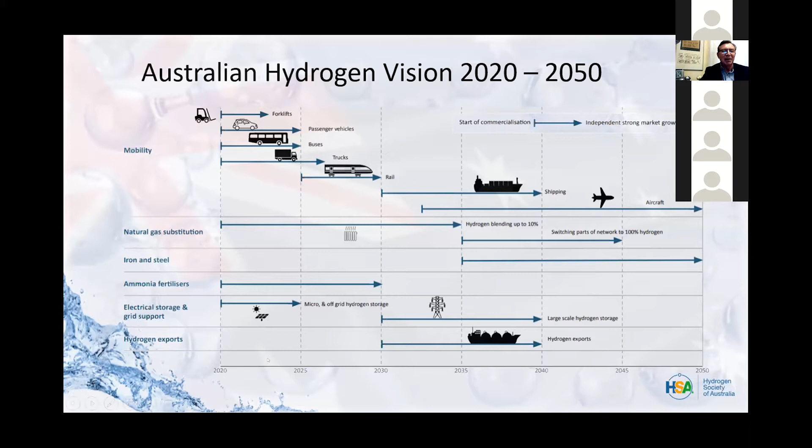With hydrogen export, for example, this was an ambition planned for 2030, but we're way ahead of that plan. The Kawasaki project in Latrobe Valley has already finished the ship—well, not finished yet, but it's already on the water and being finished, and the first shipment is planned towards the end of this year. So somewhere right here—theoretically there was already the first export of hydrogen from Australia to Japan, but that was more of a symbolic thing between universities. But hydrogen ships—still, we are pretty much ahead of time.

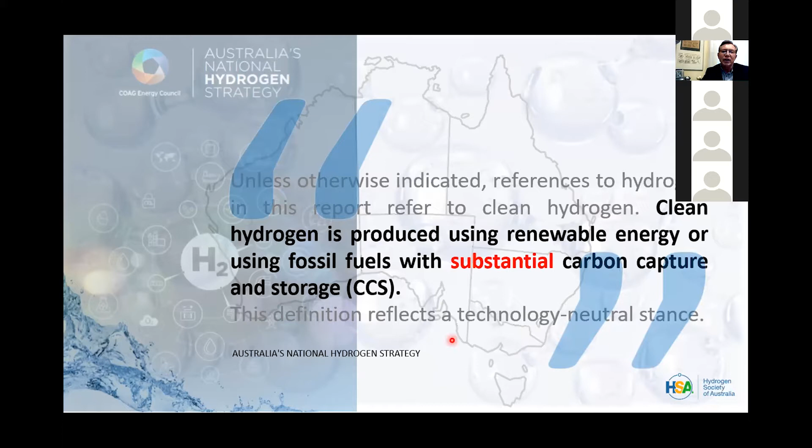Most of you know we have Australia's national hydrogen strategy from last November, and it's interesting that in bold we can see: hydrogen, clean hydrogen, is produced using renewable energy, or using fossil fuels with substantial carbon capture and storage. For government, this is purposely quite fluid, because 'substantial' isn't really a defined word. We are a leading exporter of coal and LNG, which together make up about $110 billion of our exports, so we cannot simply quit everything and switch to a different type of fuel.

So it will take evolution rather than revolution in Australia. As you can see here, the mature uses are already established. However, transport is a big thing, a new emerging use for hydrogen, and that's across all areas, not just heavy transport.

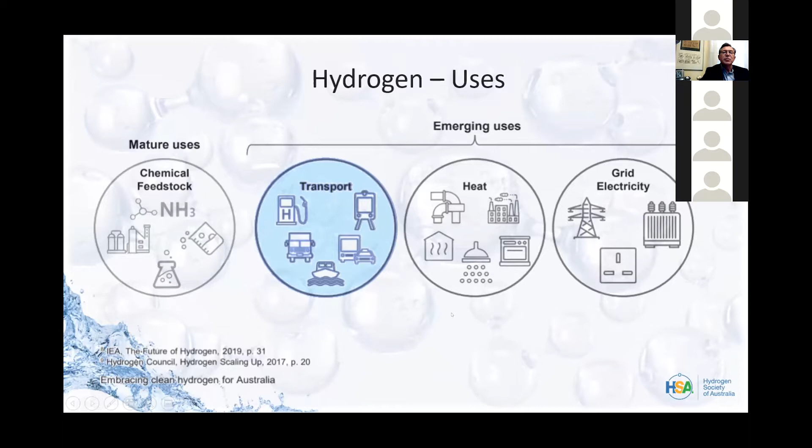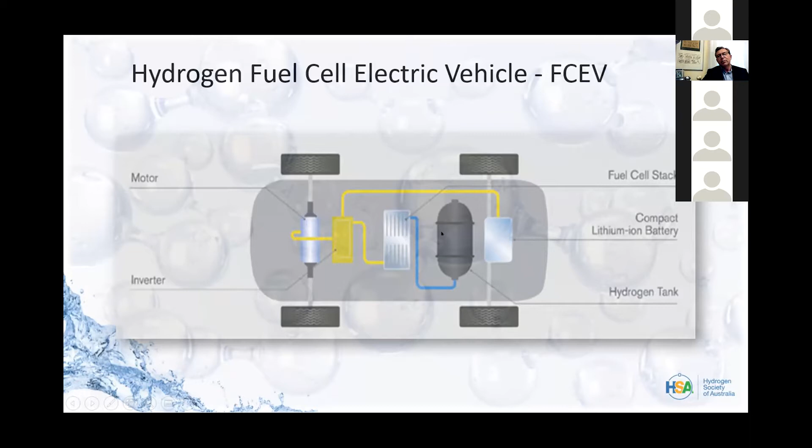Most of you on this call probably already know how the vehicles work, but just in case, very briefly, this is the inside of a hydrogen vehicle. I still come across people who don't know that hydrogen vehicles are actually electric vehicles. They do have batteries, small ones, and they have a hydrogen tank and a fuel cell stack, where a chemical reaction is created inside the vehicle to create electricity.

This is how the tank looks, this is how the fuel cell stack looks, and this is a tank from a passenger car. It's made of carbon, a woven carbon, so it's extremely strong as well.

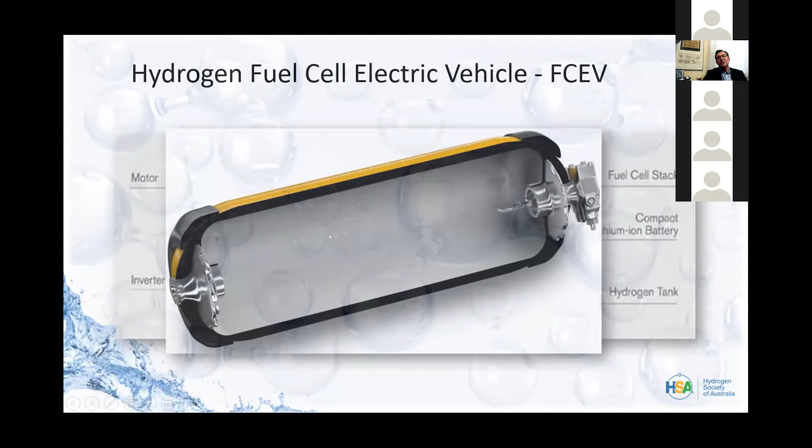I just wanted to check, since I'm not sure who else is watching, how much knowledge people have of hydrogen and hydrogen vehicles. This is according to the strategy we've been discussing, what the government is aiming for. I think Toby mentioned getting to $2 by 2030.

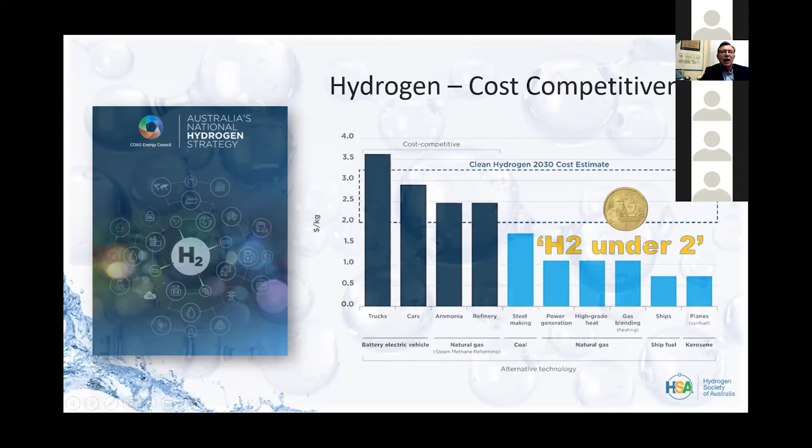However, what's interesting is that since then, in less than six months, the government's view changed. Now there's a big campaign called 'H2 under 2,' where we're basically now trying to get to that level. How far this will go, people are speculating. Could it go that far? That would mean hydrogen could be used across the board in all industries, or it couldn't. Is that actually good if you go that low? Would it be feasible for the economy? But it's an interesting exercise that in a very short time, governments who are usually very conservative changed their view so much.

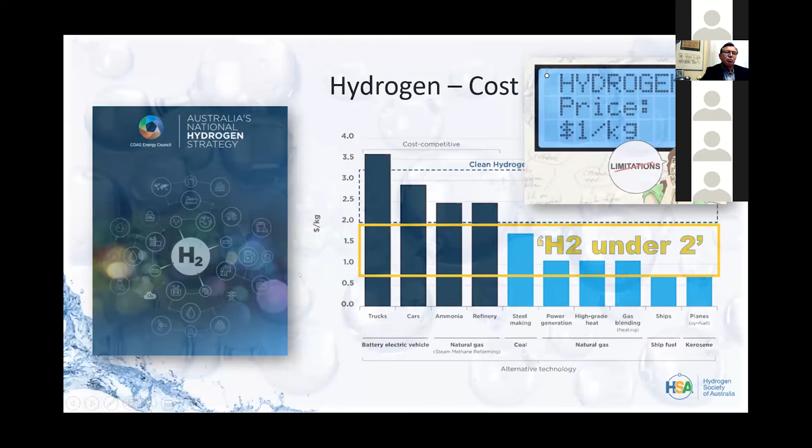Also, as you might remember, we were previously talking about Australia being 100% renewable. Then last year our chief scientist was talking about 200% renewable, meaning we could export the rest. And now we're talking about 700% renewable resources, with Australia becoming a major exporter of renewable energy.

It's probably not huge numbers of those vehicles, depending on the economy. In Western Australia we have between 500 and 750. So it's not a huge number of vehicles itself, but they're like 2 megawatts on wheels, so they're huge power plants. Basically you pour diesel in them. They're electric vehicles, so they actually drive as electric, but they've got big generators onboard.

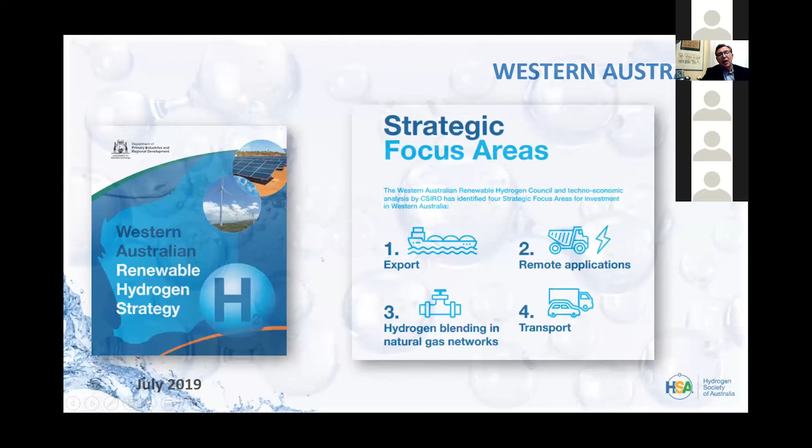There are some big projects, since Western Australia is especially a big place. I don't know if Stephen is actually on this call, but there's the Arrowsmith project, which is $300 million. I know they're trying to even expand it right now, talking to Arena. We also have a huge project, the Murchison project, which is 5 gigawatts, a gigantic project actually happening here. Some of the hydrogen is supposed to be fed into our gas pipeline, from Bunbury to Dampier.

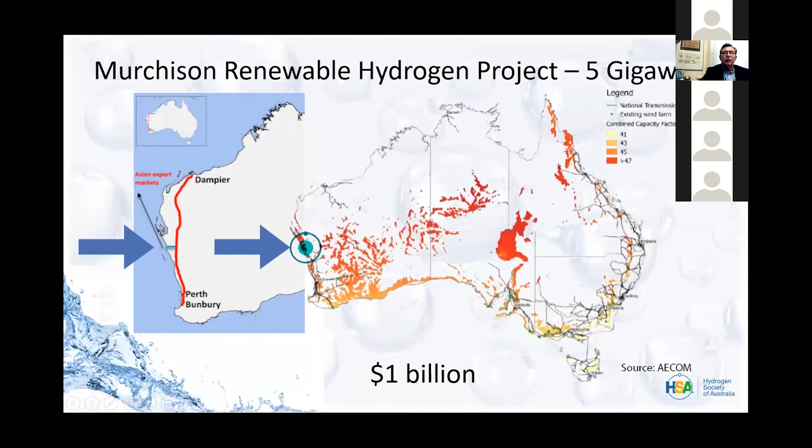Many of you know about the Asian Renewable Energy Hub, which has been on drawing boards for a long time and is now in the process of being implemented, which is giant.

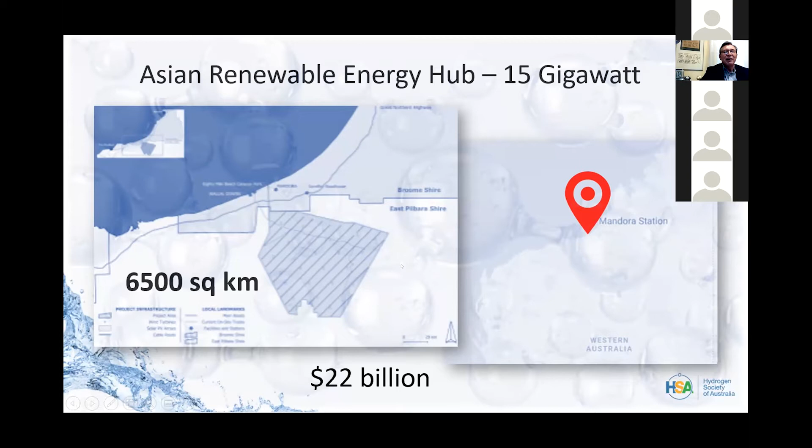This is, you know, sort of like a small country - 6,500 square kilometers, 15 gigawatt project.

Our participation in this Western Australian landscape is actually through Innovate Australia, which I run. It has many initiatives. One of them is the Hydrogen Society of Australia, and the main project of the Hydrogen Society of Australia is the Hydrogen Highway, which we created as a group back in November 2018.

Then there's Linda Reynolds, who is now minister for defense, but was a senator for Western Australia and a great advocate. Just recently I had a long Zoom with Linda as well, and she's a great supporter of the Zero Emission Highway Project.

So recently - I know Craig is on this call - we organized an event, we run events from time to time about the Hydrogen Highway and now the Zero Emission Highway. We had Neil Thompson from ITM Power, Craig representing Horizon Fuel Cell, Hyzen Motors with trucks, and Cam Dumesny, who runs Western Roads Federation - basically putting infrastructure, vehicles, and people together and discussing how we can make this into reality.

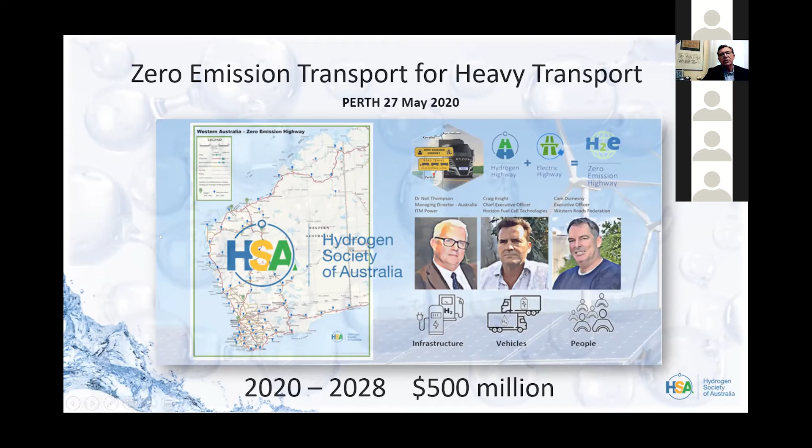As you can see, this is very important for us. That's why it's now called not just the Hydrogen Highway, but the Zero Emission Highway, because we feel very strongly that those two technologies have to work together. They do have applications in different circumstances, but they do work together.

So this one, again, that's me being a little bit cheeky - I just wanted to show some people and some politicians here what that would mean. $500 million, which is the cost of the project, an 8-year project. So this is our stadium, which I've actually been very generous with, because the stadium cost us $1.8 billion, although that includes the surrounding infrastructure as well.

That's sort of maybe not really the most appropriate comparison, but at least it shows a good illustration: converting the whole state, this giant state, into allowing heavy zero emission transport, versus just one-third the portion of a stadium. The economic impact on our future and our kids' future is going to be dramatically different between those two examples.

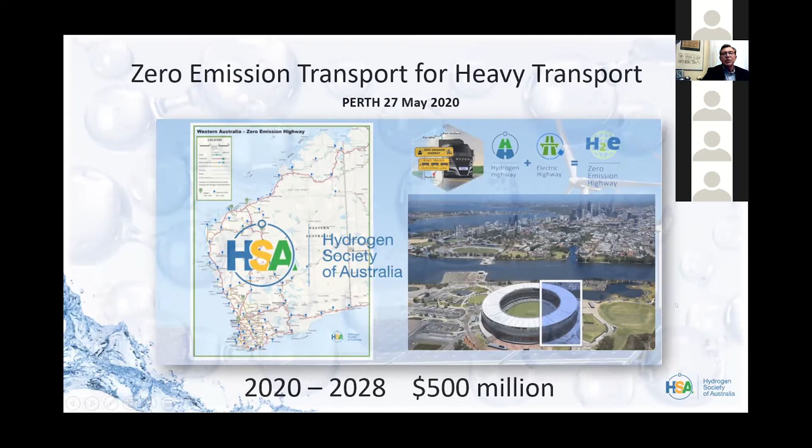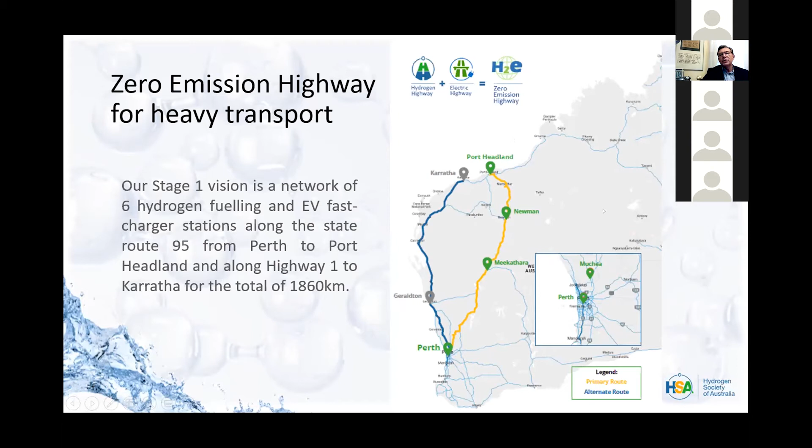So look, stage one, the idea of our vision, was basically to go from Perth to Port Hedland. That was our original plan. But then we decided - first for 2 years - but then expanded from '22 to '28 to cover the whole state basically.

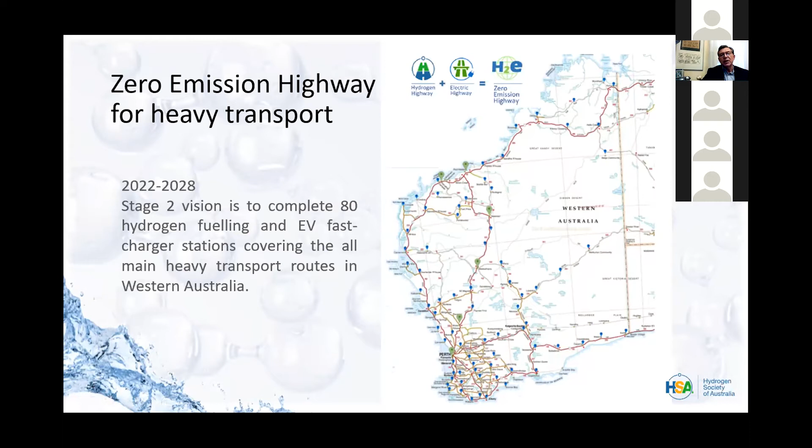So roughly we're talking about 80 stations throughout the state. What's great about it is it provides two things: it provides regional jobs, which is fantastic, and it's a big project, obviously. Right now government is looking for big infrastructure projects, so we're hoping this is something government will see as a viable option.

Many of you know this - about a year and a half ago they started in Los Angeles. I went to see the project there called Shore to Store. That was the first heavy trucking project around the world, basically $82 million, with Toyota, Kenworth, UPS, and some other partners.

The idea for that was that the Port of Los Angeles, probably like some other ports around the world, has to be zero emission by 2035. They don't see a way to do it with electricity - they have over 1,000 cars and trucks, which they cannot afford to plug in, plus those vehicles are imported and working 24 hours a day. So that's why they saw the only solution was to use hydrogen. Right now they have 10 trucks, a couple of forklifts as well, and are building 2 stations.

So again, around the world you can see this Chinese port, Qingdao. It's amazing - the whole thing is actually powered by hydrogen, and it's using 5G. As you can see, those trucks are autonomous, running around, same as the cranes. They're operated from an operation center, very similar to Western Australia. If you go to the Rio Tinto operation center, which we visited and organized an event for politicians to see, it's amazing - big screens and people just operating the whole thing remotely. So it is the future.

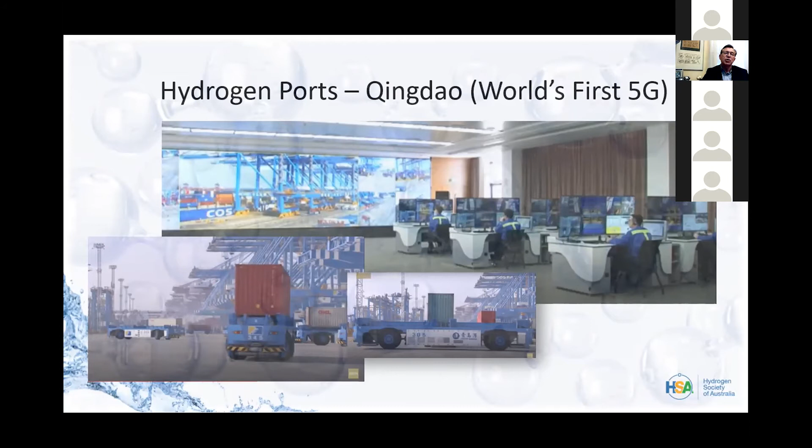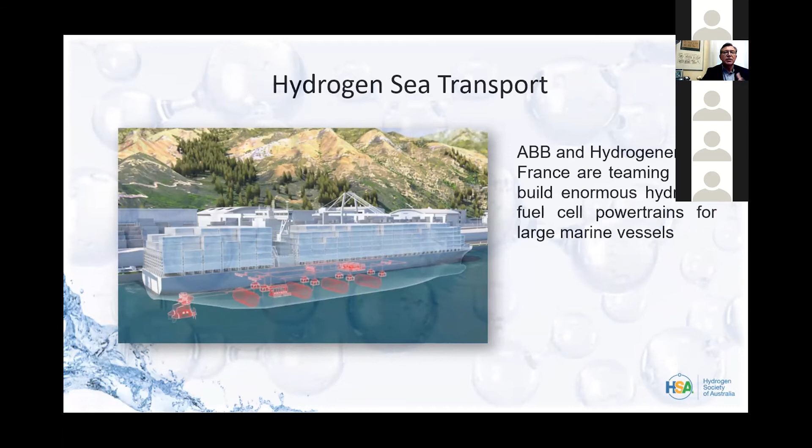Since heavy transport is going that way, it's definitely a solution for trucking. If ports are going to operate on hydrogen, it wouldn't make sense to use any other technology. Also, as you know, ABB, a Swedish company, with some French companies, is developing container ships. That adds strength to the idea of a zero emission highway, because you're using the same technology across the board.

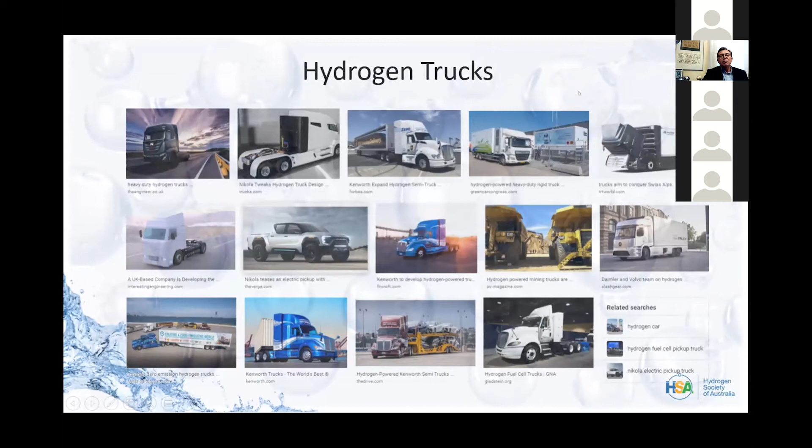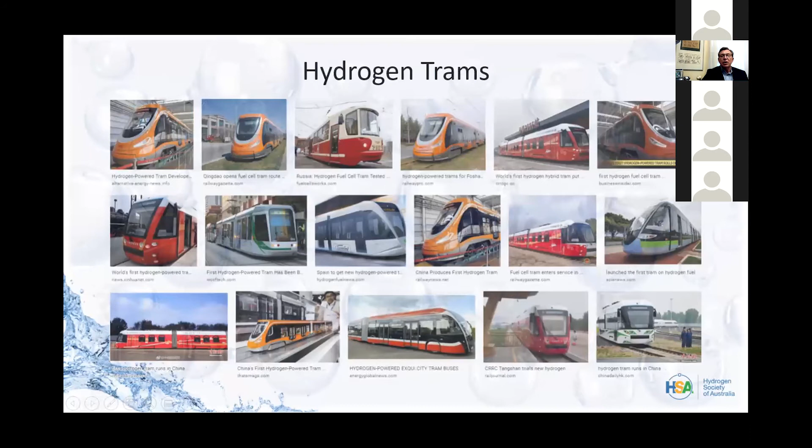Many of you know, and some of you - I didn't know who's going to be watching the presentation - but this is not just artist impression. These things are actually happening now. You've got hydrogen trucks, hydrogen trains which are already running around, hydrogen trams which are already popular, and hydrogen buses.

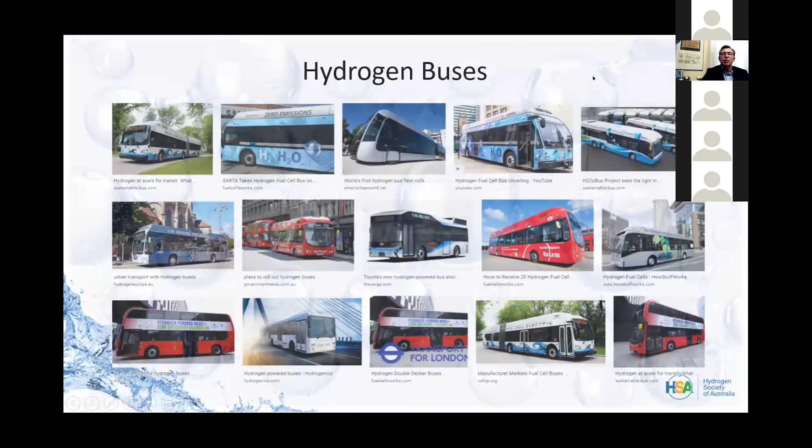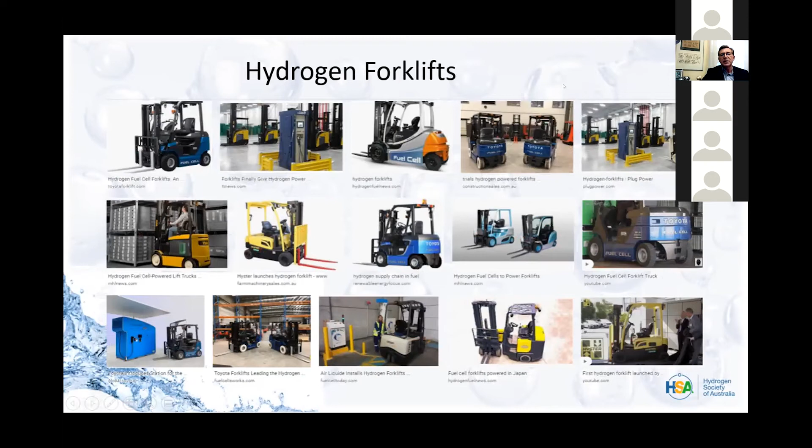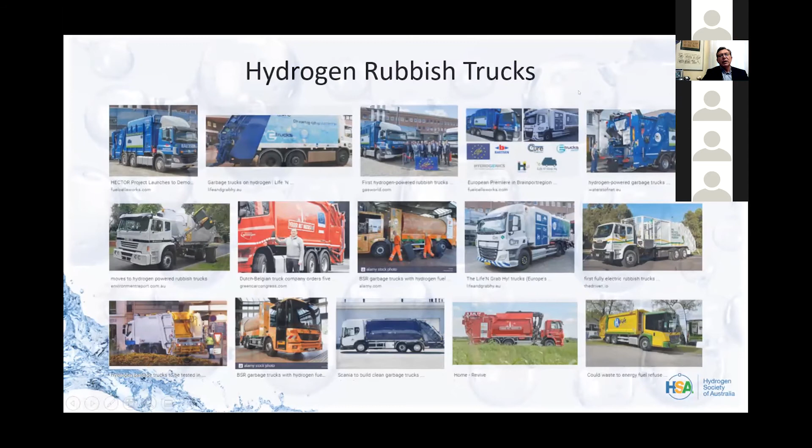As you can see, all of this works in the context of our zero emission highway. Vehicles - again, Trevor Milton, Nikola, probably the most well-known company. As you know, they just recently went public, and the public offering went very well.

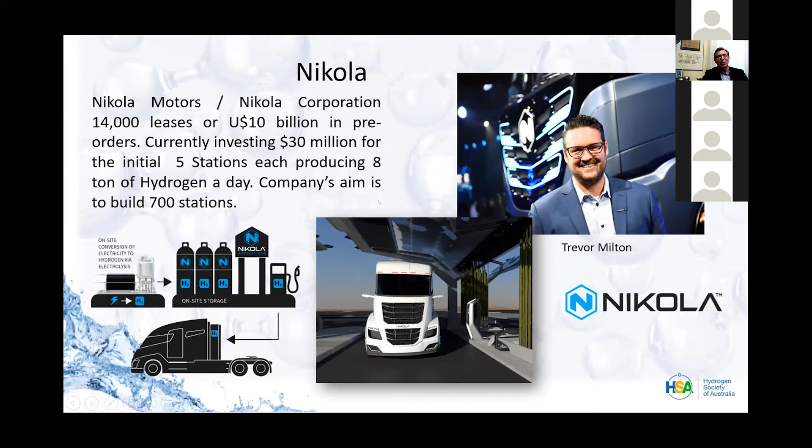So at least according to the company, the claim is that they've got $10 billion in pre-orders right now, and 14,000 leases. As you know, Anheuser-Busch bought 800 of the vehicles. And they're building with Nel, the Norwegian company, a chain of hydrogen stations. We're hoping to see them - I'm trying to convince Trevor, writing commercials for him and stuff - to bring him to Australia as well. I know this isn't the priority, but I'm hoping to see it on our roads.

We've got Craig Knight, who's also part of our presentation here, and Craig represents Horizon Fuel Cell Technologies, but also Hyzon Motors. Again, being active in Australia, and we're hoping to see it shortly.

We've got Brendan Norman - although not trucks, but I thought I'd mention it because just recently, about a week ago, there was a lot of press about H2X, talking about taxis and machinery for agriculture as well.

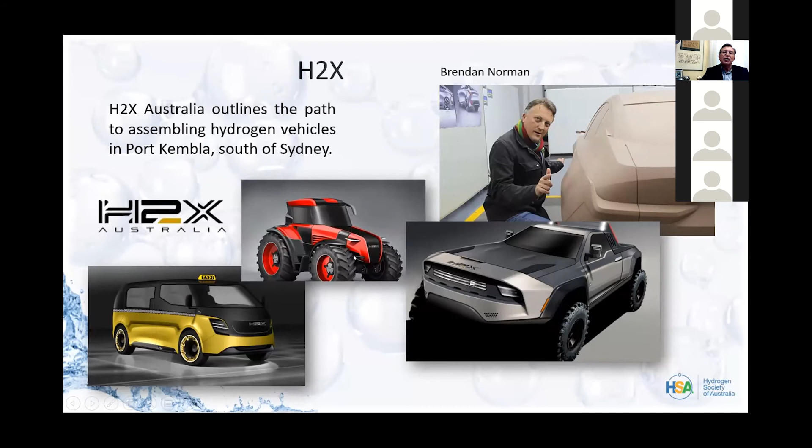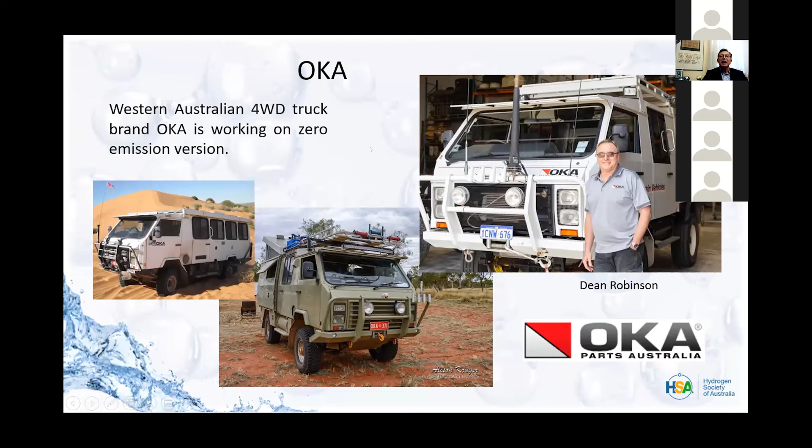And this is our pride and joy, locally - Dean Robinson. This brand has actually been around for a long time, I think since '92, but right now Dean is also working on - I know he was talking to Craig as well - developing zero emission solutions. So he's been looking at both electric and hydrogen vehicles. Hopefully we will have domestically made vehicles running on the zero emission highway, made here in Western Australia.

That's it for me, and if there are any questions, then I welcome them.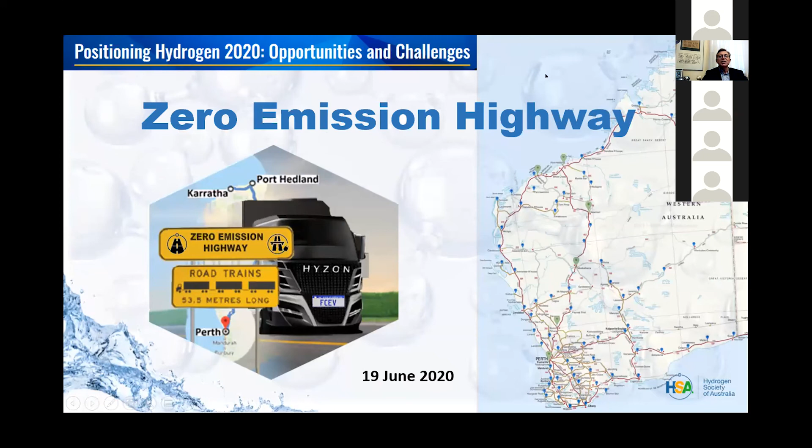Thank you, Peter. It's a really nice talk, and it looks like hydrogen is going to change our future mobility and the way we are thinking about it. And there are many questions - I think many people are interested in your talk, and you might need to go over there to answer all of them. One from my side: people are thinking about transport, and there's one question moving around that we are mostly talking about transport in the form of ammonia.

Someone is asking whether we can use some pipeline for the transport. It will be cost effective. What do you think about it?

Yeah, look, ammonia plays a huge role. A lot of you might remember about a year and a half ago, there was a big announcement from CSIRO. Dr. Michael Dolan at University of Queensland was working for CSIRO. They developed a membrane to convert ammonia to hydrogen and hydrogen to ammonia.

Andrew Forrest, who is our sort of local Elon Musk, a maverick billionaire, actually grabbed Michael and brought him here to Perth. So Michael actually lives in Perth right now with his family and works for FMG, for Andrew Forrest. And they have a whole team of international people working on developing that technology.

So we do have in Western Australia a Yara plant in the Burrup Peninsula up north that actually supplies 5% of world ammonia. And right now there's a company called Perdaman building another plant which is supposed to be the largest ammonia plant. So there's a lot of work towards using ammonia for transporting as well, utilizing our ability here.